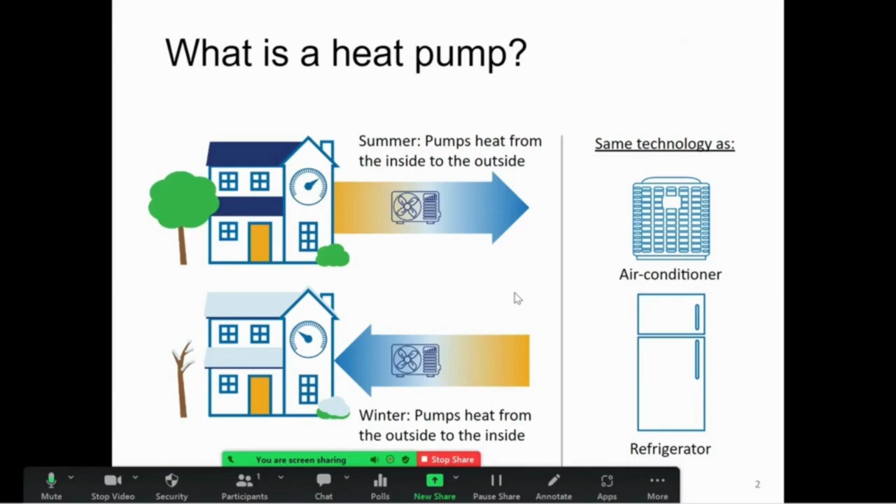What is a heat pump? A heat pump is something that can help you bring in heat from the inside and send it to the outside, so in the summertime you can be cooler, just like an air conditioner works. A heat pump can also take heat from the outside, even at cold temperatures, pressurize it, and bring it inside to help heat your home in the winter. So a heat pump can do both. It's very versatile, using the same kind of technology we use in air conditioners and refrigerators today, but in a more sophisticated way. Heat pumps do not generate heat—they move it from one setting to another.

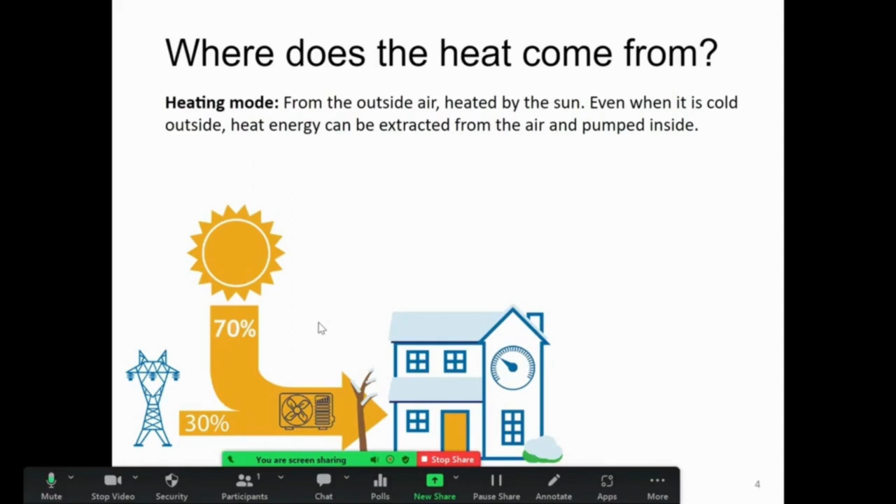Where does the heat come from? In the heating mode, the heat comes from the sun, which heats up the outdoors. With some electricity to pressurize the refrigerant inside the heat pump, we can take that heat from the sun, bring it into the house, and pump it inside at temperatures useful to us. In the cooling mode, we take heat from the inside and pump it outside with a little bit of electricity, and you get really good performance with the heat pumps on the market today.

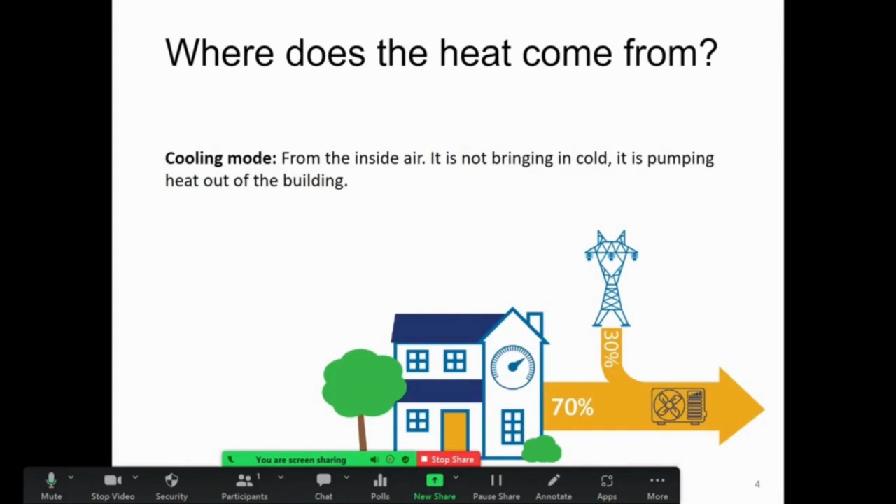In the cooling mode, the same pumped refrigerant collects heat in a depressurized state from inside the house and delivers it outside, thereby cooling your house like an air conditioner.

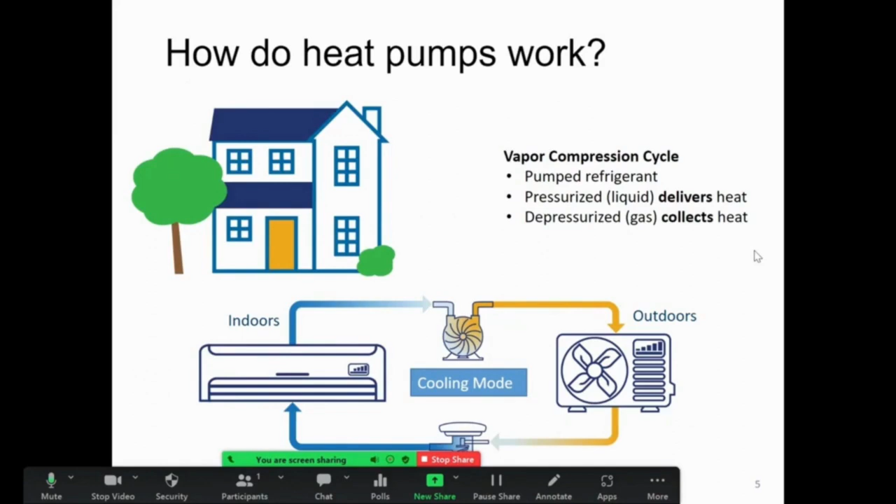What are the customer benefits from using heat pumps? You can save money on your utility bills and stabilize your costs—you don't have to worry about costs going up, because you're utilizing electricity, and sometimes you can provide that electricity with renewable energy, either on site or from the grid. You can add cooling to spaces that only have heating. You can provide increased control and capacity using it as supplemental equipment. And you can avoid the risks from having combustion heating in your home.

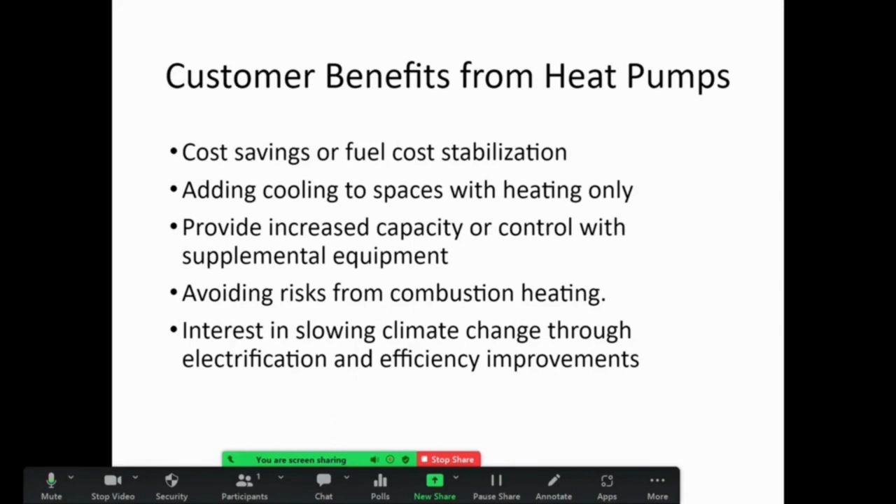There's also great interest now, in the country and around the world, in slowing climate change. Heat pumps are very helpful for this because they allow you to use electricity, and that electricity can come from clean energy like solar and wind. Heat pumps also let you take advantage of efficiency improvements.

So what are the market trends for heat pumps? We're seeing a national trend toward electrifying buildings. The electric grid is getting cleaner, and we're switching from fossil fuels to electricity, allowing homes to lower their climate and pollution impacts by using electricity that comes from renewable energy like wind and solar. Also, heat pumps are significantly more energy efficient—their efficiency is higher than fossil fuel systems like natural gas furnaces.

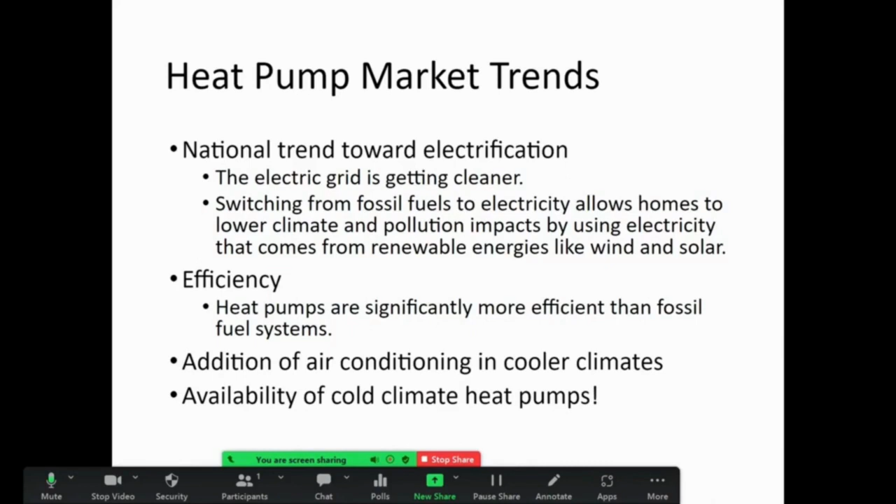It also allows you to add air conditioning, and now we have a breakthrough in the market: cold climate heat pumps. It used to be that heat pumps couldn't work well in cold climates, but the technology has improved, and now it's a possibility in lots of places where it wasn't before.

So what are the advantages of adding heat pumps if you're a heating and cooling business owner? It offers opportunities to increase your sales and, of course, increase maintenance opportunities for customers with heat pumps—any HVAC equipment needs to be serviced, and this does too. Some customers will use dual systems, having both a furnace and a heat pump, so the heat pump doesn't have to be as large, and your supplemental heat might be more cost effective.

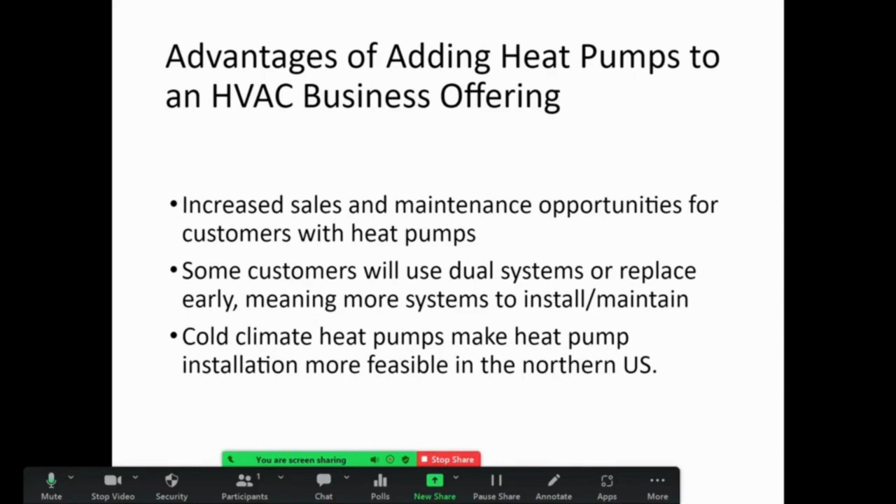That gives you a couple of systems that you can help the homeowner maintain. And because of these cold climate heat pumps, you now have a way to offer them as a product in the northern parts of the United States. That can give you additional sales while helping your customer at the same time.

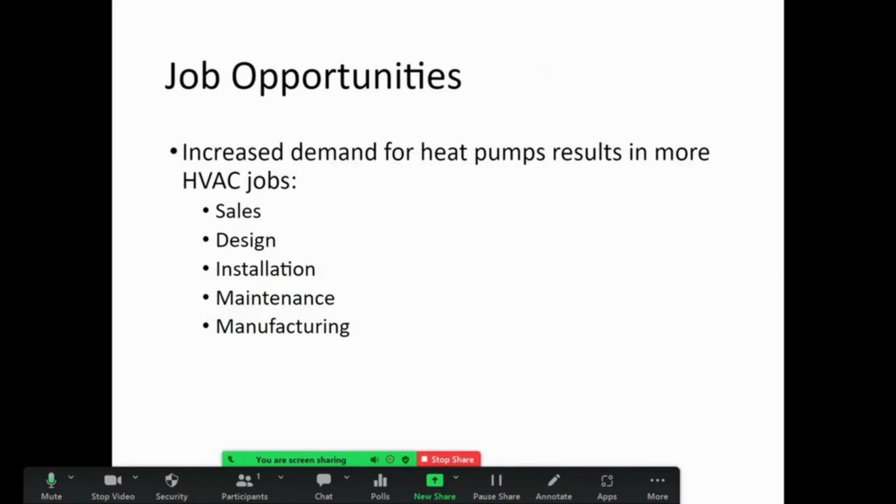There are lots of job opportunities in this, right? This increased demand for heat pumps is resulting in more kinds of jobs like sales, design, installation, maintenance, manufacturing, education, and more. Now, air source heat pumps, that's what ASHP is.

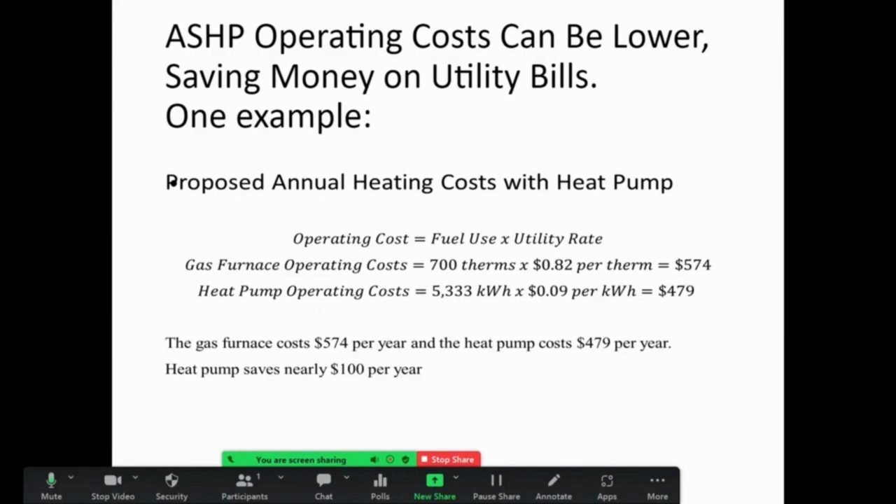Air source heat pumps have operating costs that actually can be lower, can help you save money on utility bills. And it varies from household to household. But here's one example where the proposed annual heating costs with the heat pump will actually save $100 a year over the gas furnace. I'm not going to take the time to go through the calculations, but it's a pretty fun thing to understand.

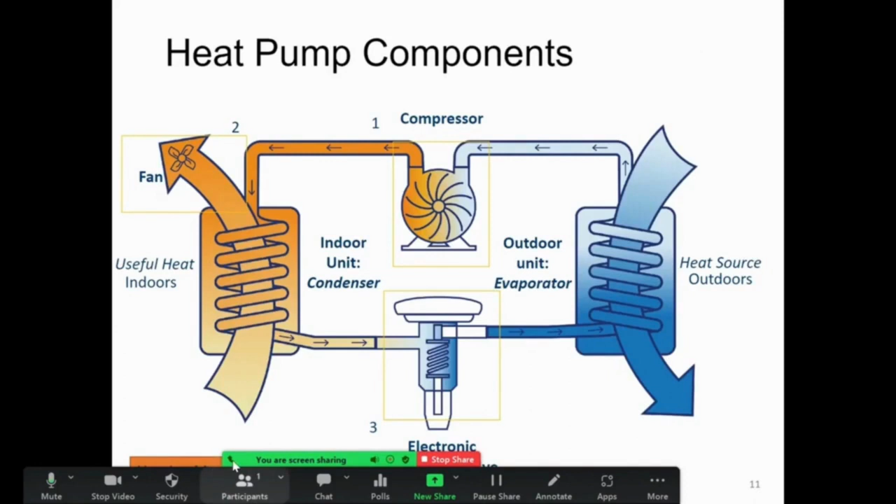So the components of the heat pump are a condenser, a compressor, an evaporator, and as you can see here, it's covered up, so I'm going to call it an electronic expansion valve.

Depending on the mode you're in, this is the heating mode. What happens is it picks up heat from the outside, and then it's brought into the home through a compressor. It's cold outside in the wintertime, right? So the temperatures are lower, but the compressor, by pressurizing it, brings those temperatures to higher levels that are useful in the home for heating.

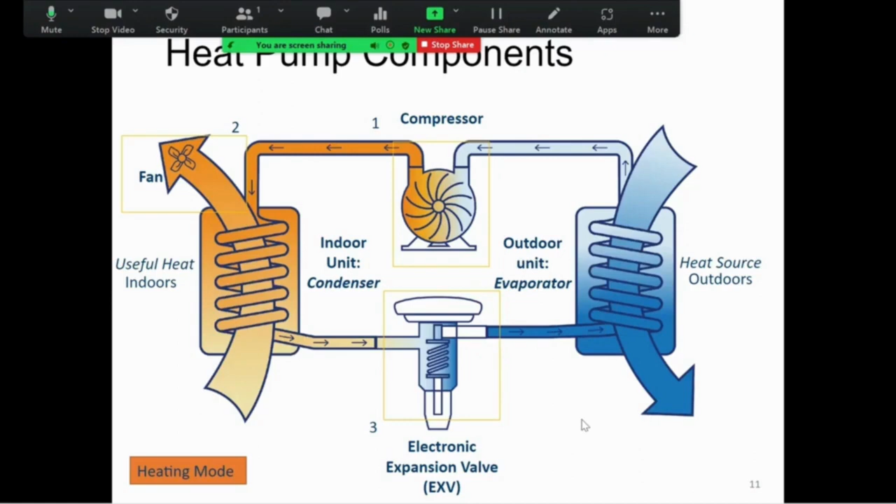And then it gets released inside through the condenser. Then an electronic expansion valve depressurizes it again so that you can go get more heat from outdoors, even though it's cold outdoors.

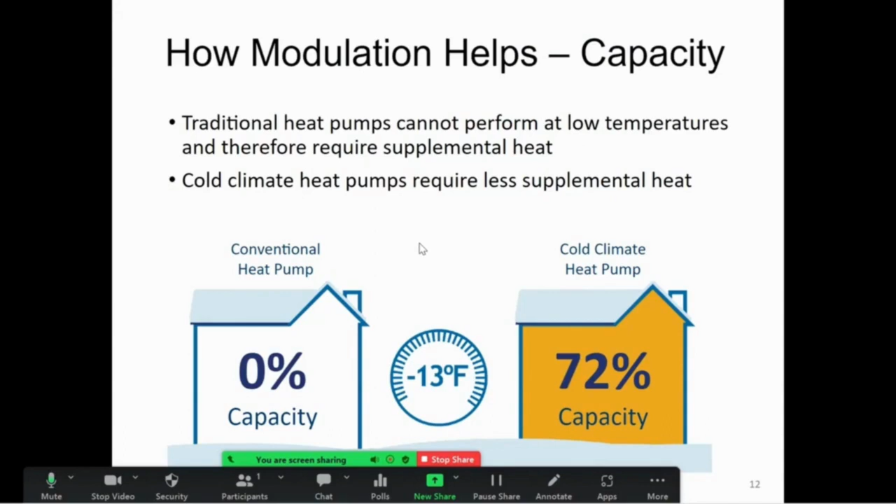We know that traditional heat pumps, the ones that used to be on the market, didn't do well at low temperatures. But the ones we have now can do quite well at low temperatures, meaning that cold climate heat pumps require a lot less supplemental heat, making them more cost effective.

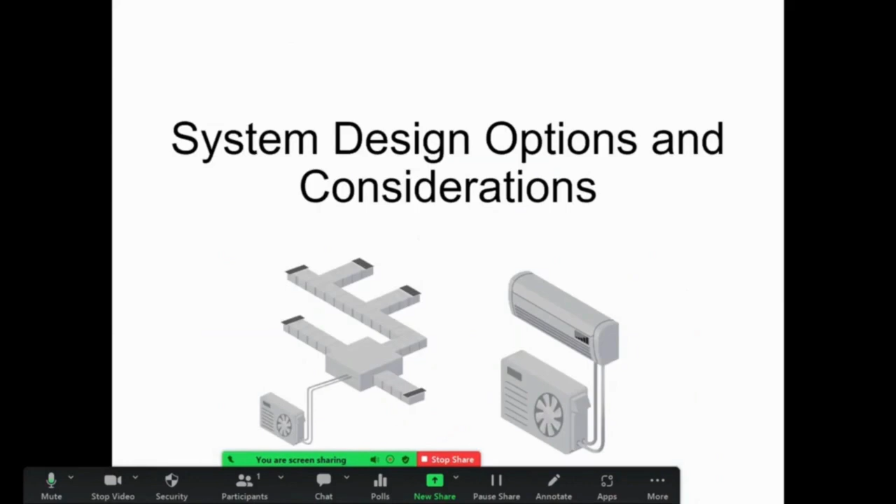Anytime you put in a heating and cooling system, there's going to be this opportunity to design it, right? Some choices have to be made. So you could become a designer and understand the difference between air source heat pump designs and the intentions of the homeowner and the contractor. You can learn the different design options, and then you can help design.

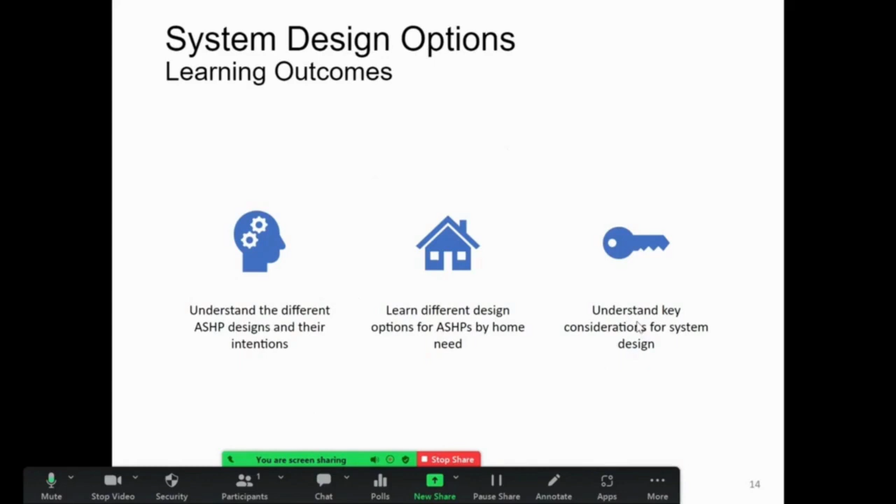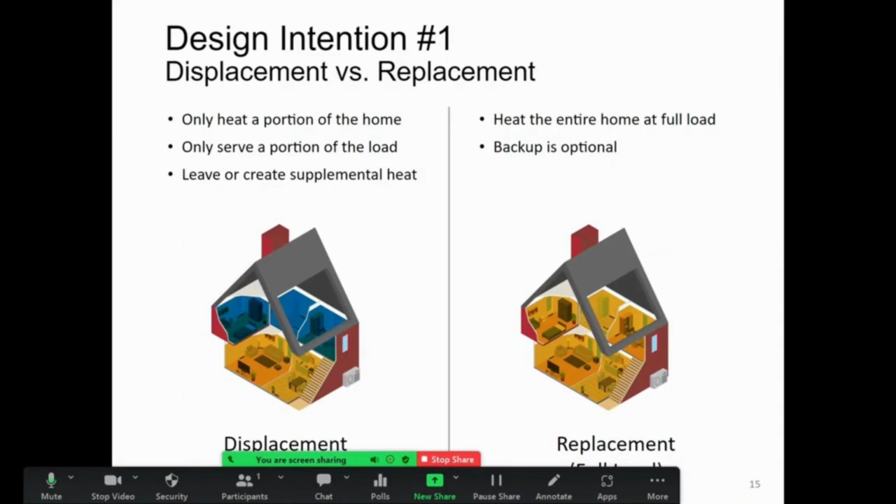Each house is a little different. Just like with any heating and cooling equipment, we want to customize it to the needs of the customer. So you've got to decide what you're going to do. Are you going to only heat a portion of the home or only serve a portion of the heating needs? Are you going to have supplemental heat, or are you going to size your system so it heats the entire home at full load without needing a backup?

You have to make decisions about whether you're going to split it into zones, each with their own heating system, or control the zones with their own thermostats. If you have larger buildings or homes, this can make a lot of sense. Or are you going to try and do a whole house system?

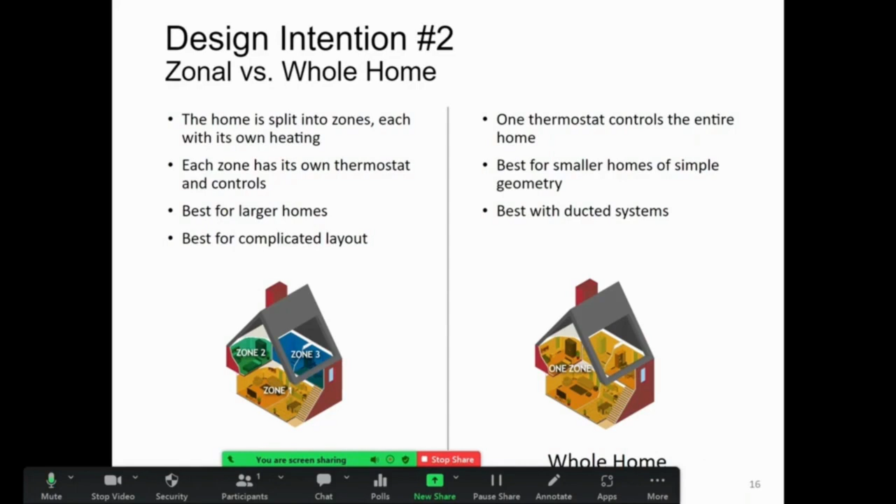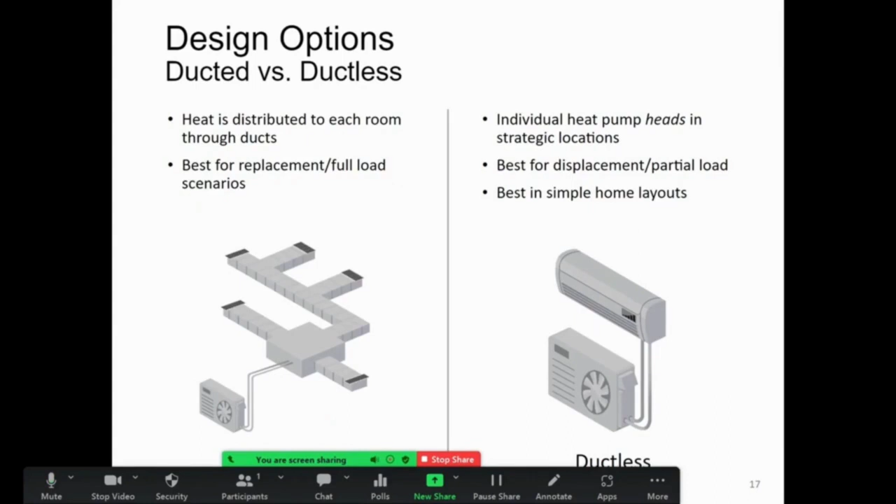This works well if you have ducts to take the energy from one place to another. It works well with smaller homes. Then you can decide: do I want a system with ducts that takes it from one room to another, or do I want ductless systems that are just based in each area you want to heat? So lots of fun choices that you have.

Bottom line, you can be a clean energy hero, either by buying a heat pump and using it, and/or having a career in the wonderful field of heat pumps, particularly cold climate heat pumps, but also in very warm areas that need a lot of air conditioning, and in moderate areas. The whole country can benefit by the use of heat pumps that are powered with clean energy, like electricity from solar energy and wind power. This is our future. Be a part of it. Thank you.